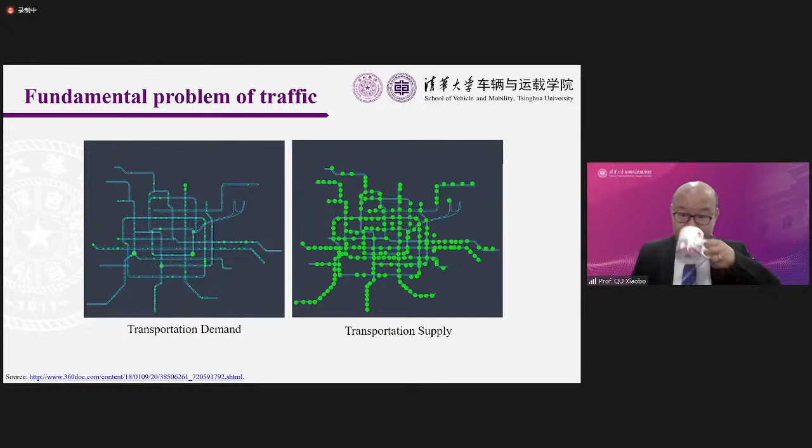And even worse, rapid urbanization amplifies the most fundamental problem of transport, which is the asymmetry between transportation demand and transportation supply.

I will use these two diagrams, two videos, to explain. The left-hand side is transportation demand, the right-hand side is transportation supply for the Beijing subway system. On the left, for transportation demand, we always have very heavy traffic during the morning peak hours.

From 7 o'clock to 9:30, it's very crowded with heavy traffic, while the volume at night is very low. The demand is changing dynamically from time to time. On the morning peak, it's very crowded; during the night low-demand period, only a few users are using our transport infrastructure.

In contrast, the supply on the right is relatively stable. Why? Because supply is determined by infrastructure. If you have transportation infrastructure, you have its capacity, and that capacity is a fixed value. It is not wise for designers to use the highest demand, the morning peak, to design infrastructure, as that would be a huge waste.

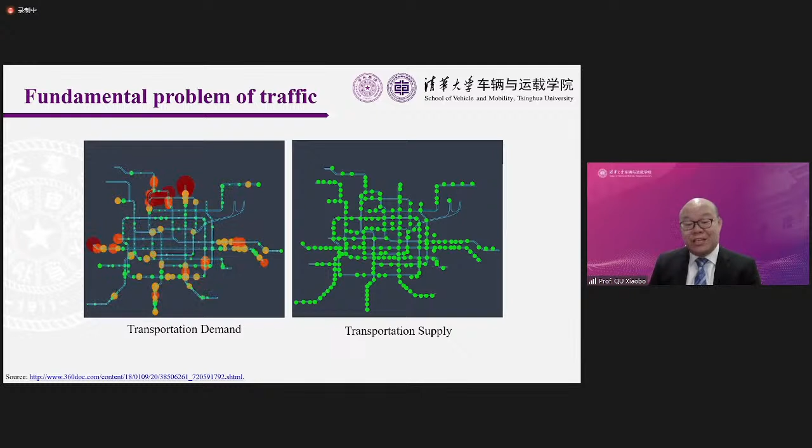We usually use the 75th percentile, meaning that under 25% of the time we are congested, and 75% of the time there's no problem. However, with rapid urbanization, we experience congestion on many more occasions. For example, in Beijing, where we live, the congestion period is certainly not limited to 25% of the time.

And in the past several years in Beijing, during peak hour at some famous train stations, it's not just the train that's full of people - the whole train station is occupied by users, by residents and commuters.

After explaining this background, in the following slides I will introduce a few case studies to demonstrate what will happen in the future. These case studies were done by my group over the past several years, and I want to share with you the latest progress in the area of transportation and vehicles.

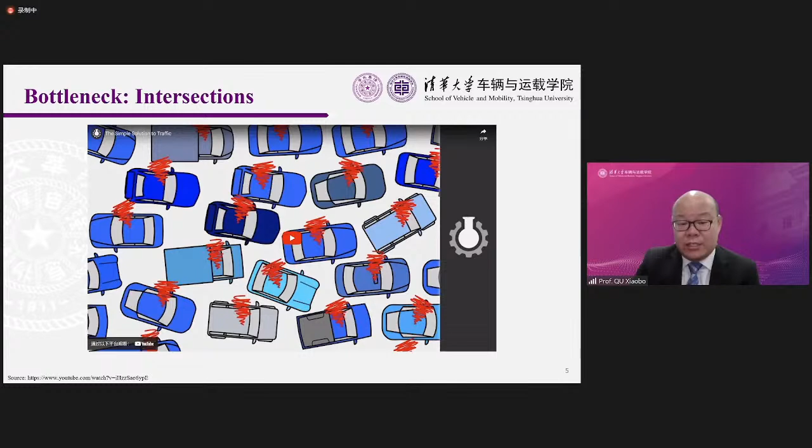So take a look at this video. I will introduce what we can do to solve the problems with connected automated vehicles in our first case study. I will introduce 3 large case studies in today's lecture.

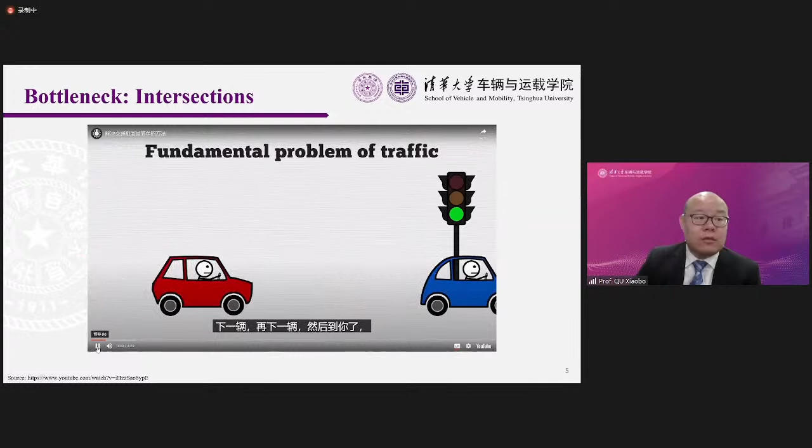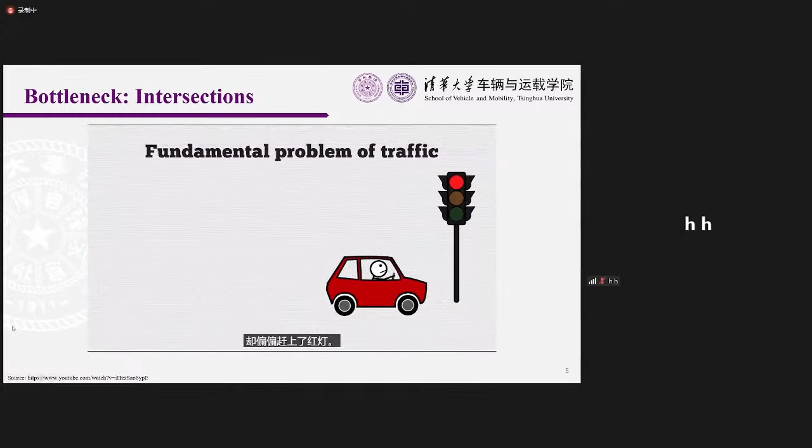Fundamental problem of traffic. On green, the first car accelerates, and then the next, and then the next, and then you, only to catch the red. Had the cars accelerated simultaneously, you would have made it through. Coordination, not cars, is the problem, because we are monkey drivers with slow reaction times and short attention spans. Even if we tried, getting everyone to press the pedal on 3, 2, 1 now would be challenging. This discoordination limits how many cars can get through an intersection, and when one backs up to the next, that's when city-sized gridlock cascades happen, taking forever to clear. In general, more intersections equals more discoordination, which equals more traffic.

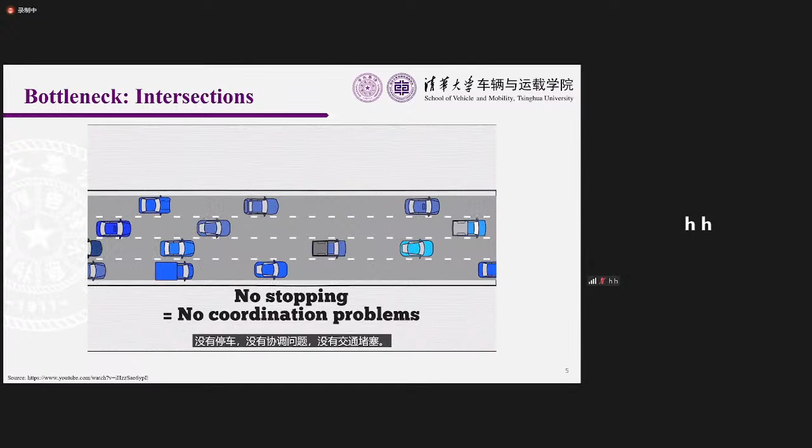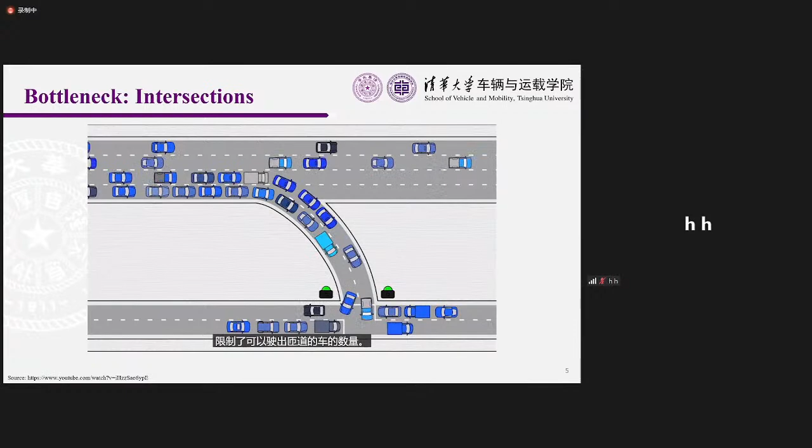This is the motive behind big highways. No intersections. Splits and merges, yes. Intersections, no. No stopping, no coordination problems, no traffic. Well, that's the theory anyway. Intersections outside of a highway will back up onto it, again, because human reaction times limit how many cars can escape the off-ramp when the light changes.

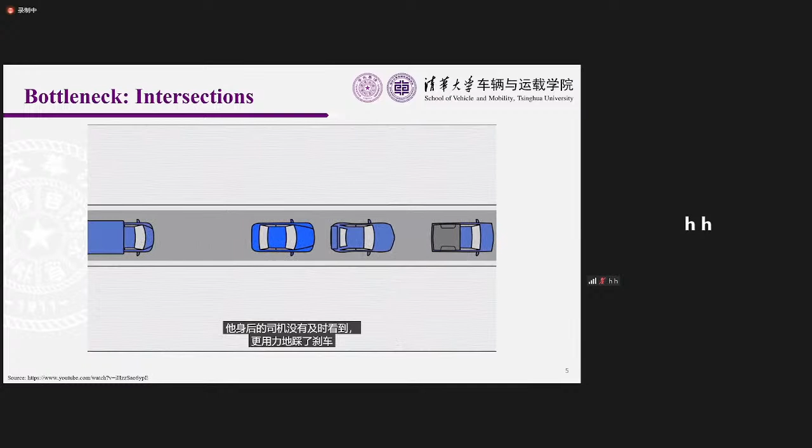But even without intersections, there would still be traffic on the highway. Traffic can just appear. Take a one-lane highway with happy cars flowing until a chicken crosses the road. The driver who sees it brakes a little, the driver behind him doesn't notice immediately and brakes a little harder than necessary. The driver behind him does the same until someone comes to a complete stop. And oh look, cars approaching at highway speeds must now stop as well. Though the chicken is long gone, it left a phantom intersection on the highway. This is what's happened when you're stuck in traffic for hours thinking there must be a deadly pile up ahead, and then suddenly the traffic's over with no wreckage in sight.

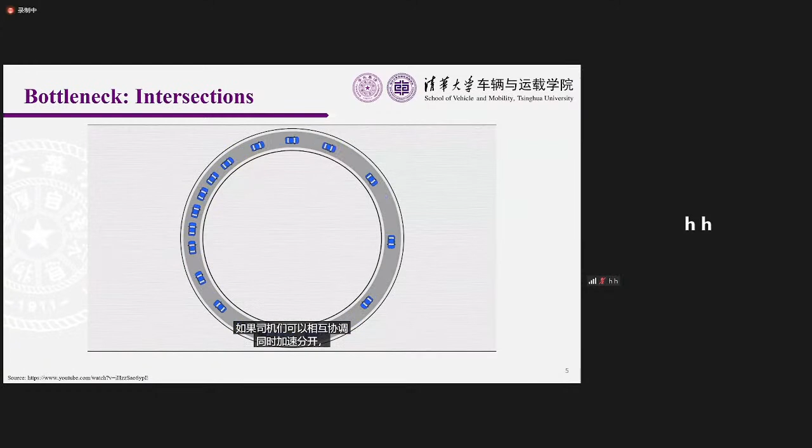To your relief if you're a good person and mild annoyance if you aren't, you just passed through a phantom intersection, the cause of which is long gone. And this phantom intersection moves. It's really a traffic snake slithering down the road, eating oncoming cars at one end and pooping them out the other. On a ring road, a single car slowing down will start an ouroboros of traffic that will last forever, even though there's no problem with the road. If the drivers could coordinate to accelerate and separate simultaneously, easy driving would return. But they can't, so traffic eternal. On highways, traffic snakes grow if cars are eaten faster than excreted, and they shrink if excreted faster than eaten, dying when the last car accelerates away before the next car must stop.

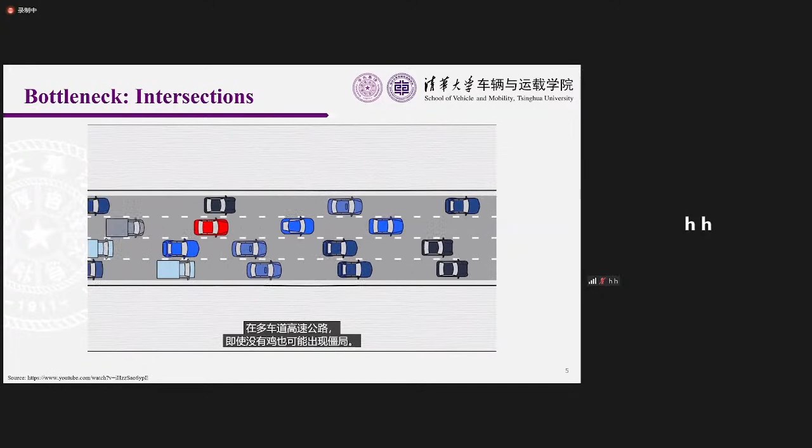Now, in multi-lane highways, there needs be no chicken to start gridlock. A driver crossing lanes quickly with cars too close behind is enough to birth a traffic snake that lives for hours and leagues. It's this quick crossing that causes drivers behind to overbrake and begin a chain reaction. But we can make traffic snakes less likely by changing the way we drive. Your goal as a driver is to stay the same distance from the car ahead as from the car behind at all times. Tailgating is trouble, not just because it makes accidents more likely, but because you as the tailgater can start a traffic snake if the driver ahead brakes.

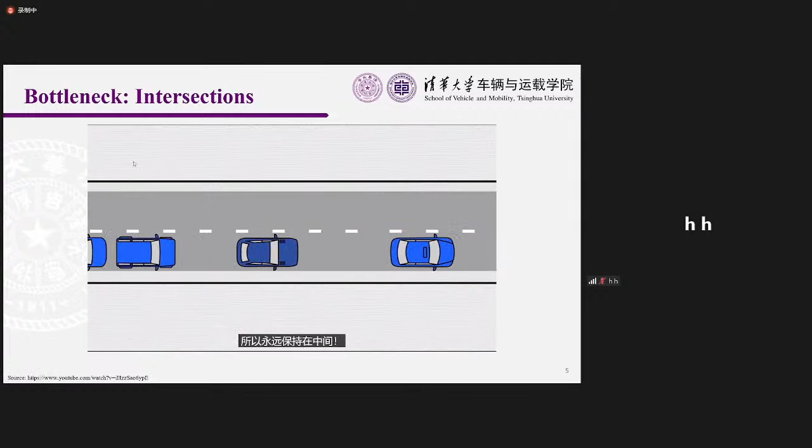Always in the middle. This gives you the most time to prevent overbraking, but also gives the driver behind you the most time as well. And when stuck in traffic, this rule would get all cars to pull apart the snake faster. That's the simple solution to traffic, getting humans to change their behavior, perhaps by sharing this video to show how and why traffic happens, why tailgaters are trouble, and how we can work together to make the roads better for all. The end. Except, yeah, wishing upon a star that people are better than they are is a terrible solution every time. Instead, what works...

Okay. In the following, I will introduce what we can do to resolve the problem with self-driving vehicles. Okay?

So for human drivers, as mentioned just now, we have limitations. We have slow reaction time, we are not cooperating with each other, we make mistakes. It seems not impossible, but not very likely, to solve this problem if we are the driver. At the very origin of the problem is our own limitation. It's very unlikely that people's reaction time can be shortened, and unlikely that our perception range can be enlarged.

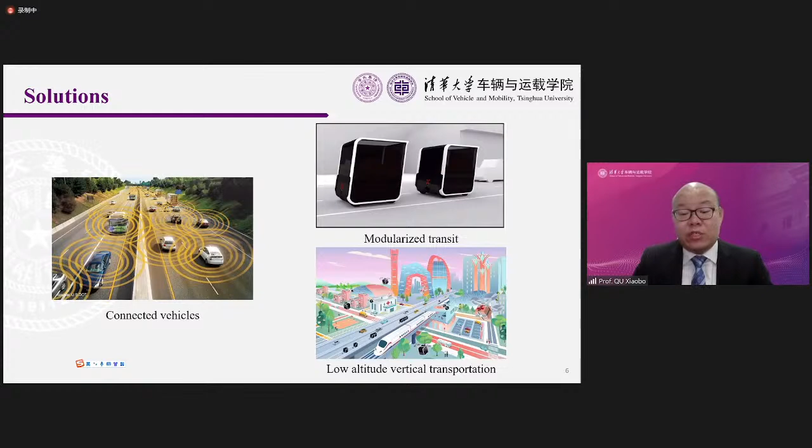However, with the emerging information and computing technology (ICT) and vehicle technology, we are in the process of fundamentally resolving this problem through connected automated vehicles, which will be our first case study. We propose modularized transit, our second case study, and low altitude vertical transportation, our third case study.

The first case study is to use connected automated vehicles, or connected self-driving vehicles, to dampen the oscillations, to solve the snake problem mentioned in that video, and get rid of stop-and-go activities, or academically, oscillations. As mentioned earlier, with human drivers we have our own limits. We have reaction time, and the drivers are different from one another - your reaction time is different from your neighbor's. We are unwilling to cooperate, or even if willing, we don't know exactly how to cooperate to maximize throughput. These are the reasons for the above mentioned problems.

In order to resolve the problem, we as vehicle engineers developed connected vehicles and automated vehicles, mainly attributed to the recent development of information and computing technology, vehicle technology, and very recently AI technologies. Connected automated vehicles don't have reaction time - they are robots, and they have much larger perception range than human drivers, who can only rely on our own eyes. However, for a single connected automated vehicle, the improvement in efficiency is rather limited. What if we have many more vehicles which are connected, automated, and cooperative? What will happen?

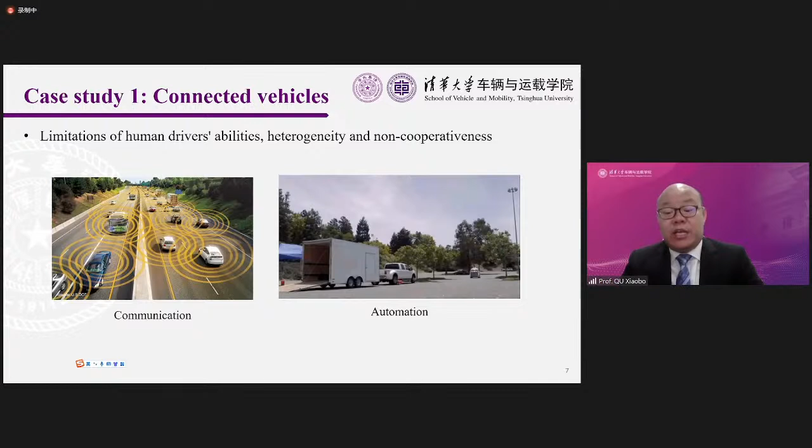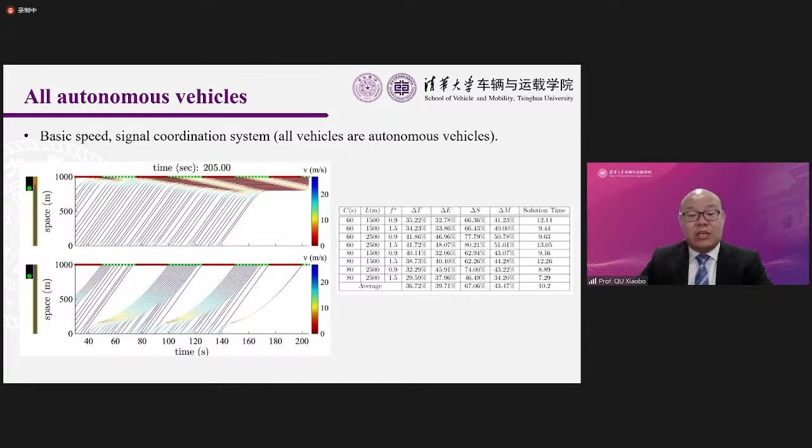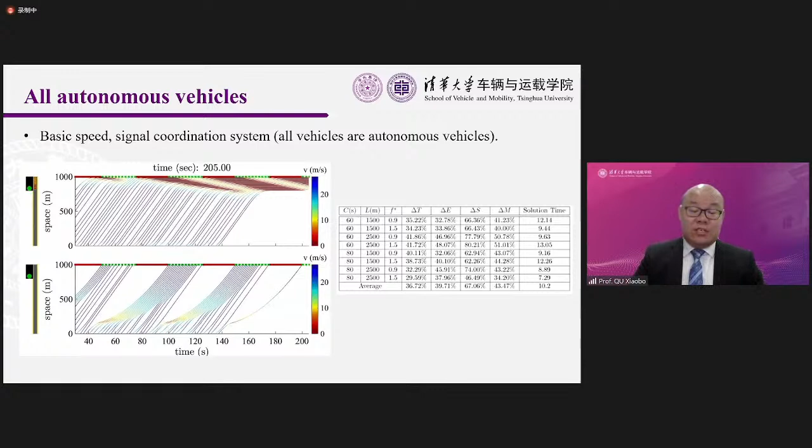In terms of safety, it's much better as well, because with stop and go activities you might have mistakes, and if you have a mistake, you have a collision. But here you don't have stop and go activities. It's easier for drivers to follow each other through the intersection than to have stop and go activities. So you have travel time benefit, energy consumption benefit, and safety benefit, for this kind of scenario if all vehicles are connected automated vehicles.

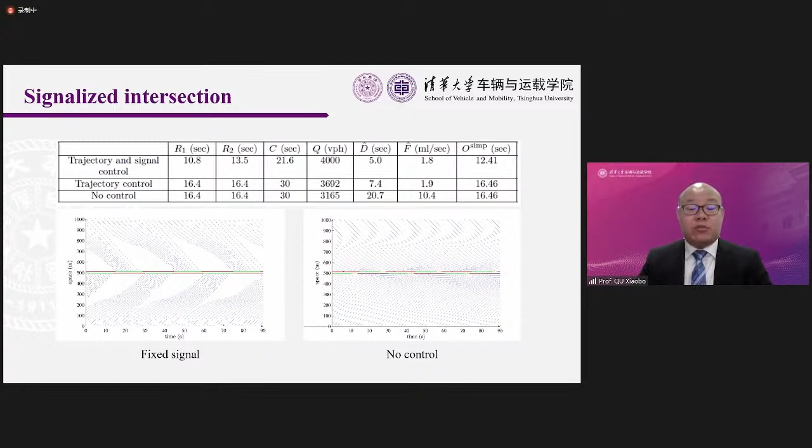Under this case, we will not be able to control each and every vehicle, but we can still regulate these 3 vehicles. We can regulate the trajectories of these 3 connected automated vehicles and influence other vehicles to have a collective benefit.

This example shows a platoon of 30 vehicles, meaning the vehicles are successively arriving one by one with a very similar time difference from one vehicle to another. In other words, the arrival pattern is uniform.

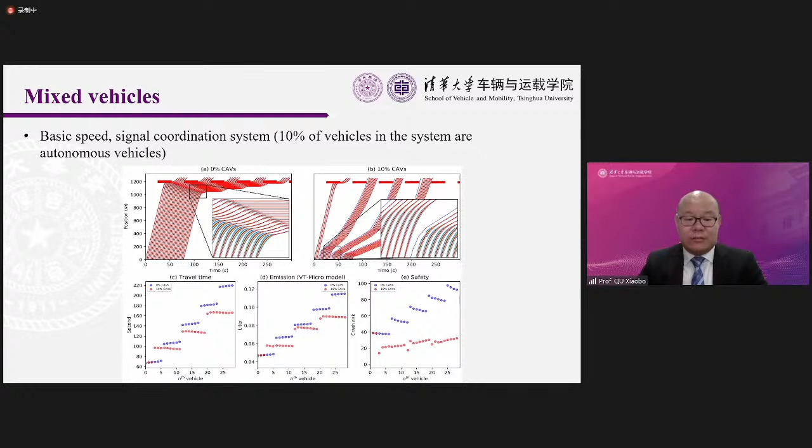When it comes to the multi-lane, multi-flow system, you have left-hand vehicles, through vehicles, and right-hand vehicles. The bottleneck is always the left-handing problem. In a right-driving system such as China, or a left-driving system like Australia, UK, Singapore, the problem is the right-hand problem - it's the big problem.

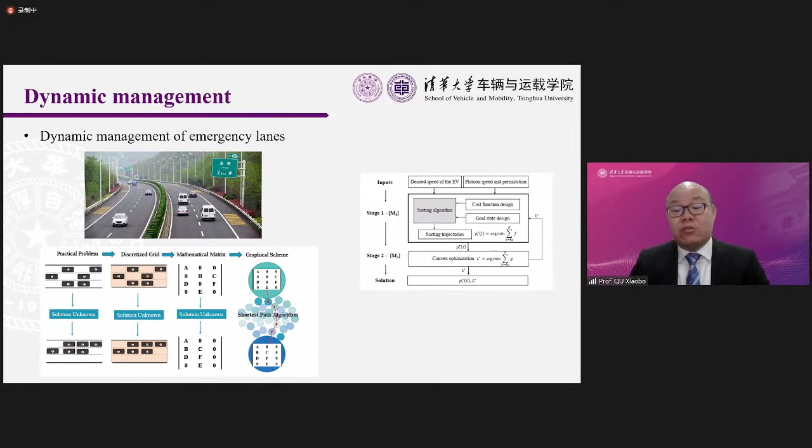These are some simulation results done by my group. If any fire engine, ambulance, or police car is coming over, they will be given priority to make sure the speed is not affected, so they arrive at the incident site as soon as possible.

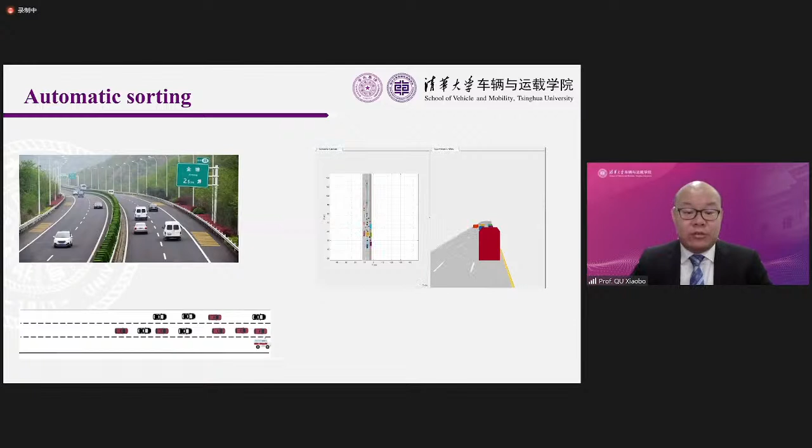Okay, that's the end of the first case study, the case study for connected automated vehicles. Now let's shift our topic to the second case study: a new transportation mode, a new public transport mode - modularized transit.

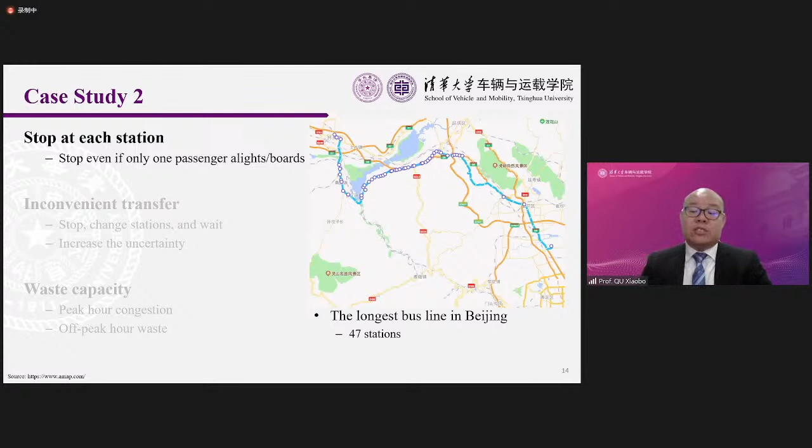For most commuters in a large city, public transport is always the first option. It is cheap, it is green, it is sustainable, right? However, we have a lot of complaints. We are not happy with public transport.

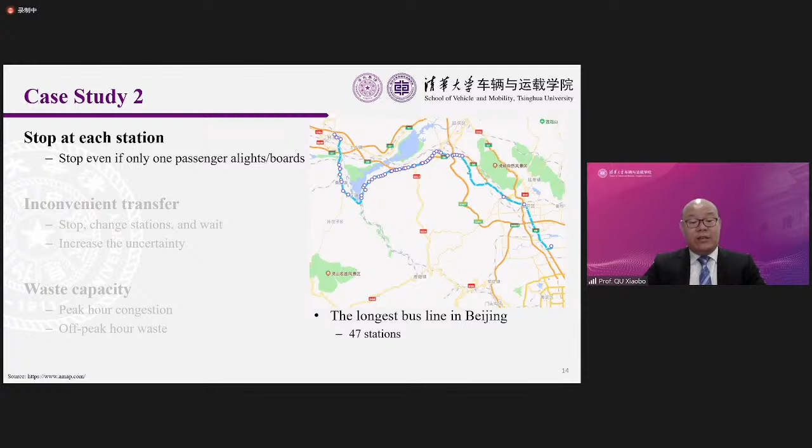First, complaint number 1: it stops at each and every station. Even if only one passenger alights or boards, the whole bus has to stop, and the rest of the users waste their travel time. For a normal bus with 50 people, if only one passenger wishes to get off, the travel time of the rest 49 passengers increases because of the stopping and accelerating. This activity is no good. So the first problem is we don't want the bus to stop at each and every station.

The second problem is inconvenient transfer.

In Beijing, over 35% of trips need a transfer to complete the journey from origin to destination. For each transfer, you have to stop, and you might need to change platform. Some stations have numerous platforms, and you need to wait for the connecting bus.

On one hand, others waste their travel time. On the other hand, your own travel time uncertainty increases significantly. You also risk missing your connecting bus, since you don't know the route from one platform to another. You might take longer than necessary and miss your connecting bus. It's very likely.

So this is the second problem: inconvenient transfer. The third problem is wasted capacity. Buses are always crowded during peak hour, but during the night, even if only one passenger is on the whole route, the whole huge bus still has to operate. It's very wasteful in terms of energy consumption and operating cost, since for the whole trip you only have one passenger but still need the big bus to operate. So that is very wasteful.

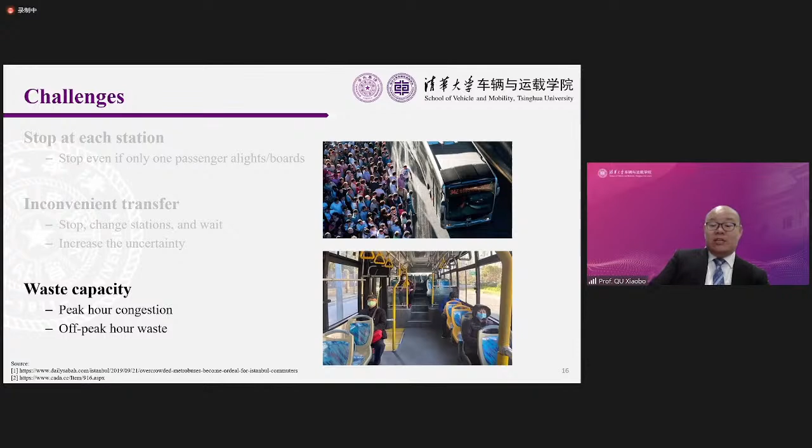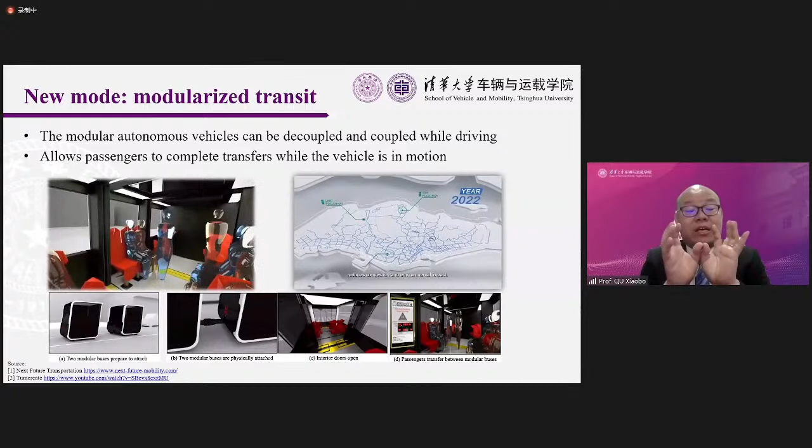So how to deal with this problem? Using traditional buses, it's unlikely to resolve the problem. But with connected automated vehicle technology, it's likely that two cabins can be connected, coupling or decoupling while in motion. One of our collaborating partners designs a modular bus, taking advantage of recent progress in information, computing, control, and connected automated vehicle technology.

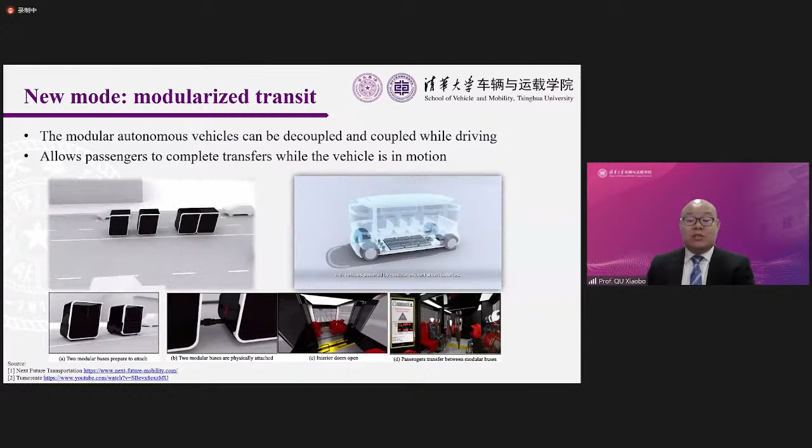The vehicle, they call it a pod or cabin. The cabin can couple or decouple while in motion, while all those cabins are moving. So passengers can move from one cabin or pod to another cabin while in motion. This system can resolve the three problems I mentioned.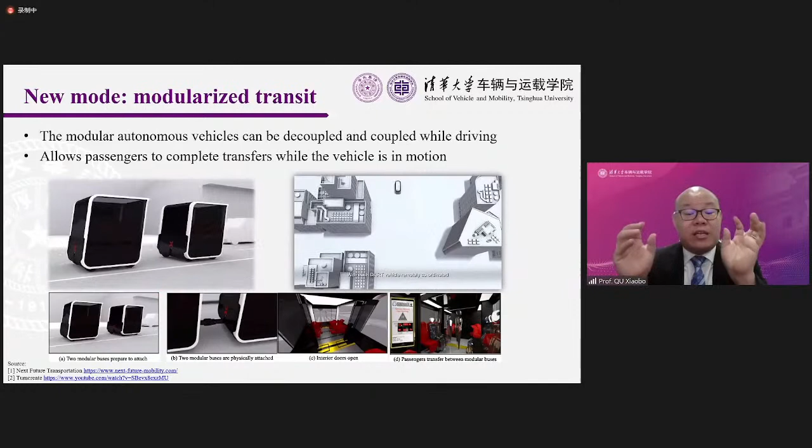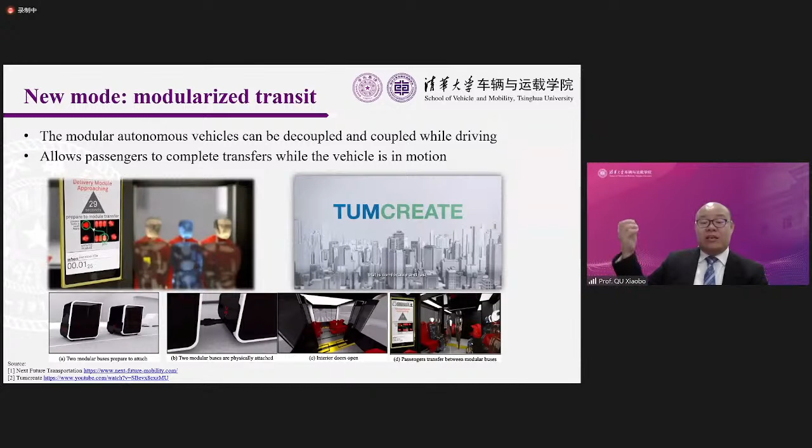During the morning peak hour, we can have multiple cabins linking together, maximizing the utilization of transportation infrastructure and efficiency. Recall the first problem: stopping at each and every station. If you have 6 cabins linking together during the morning peak, and one passenger wants to alight, all alighting passengers can transfer to the last cabin, and then we detach the last cabin for alighting and boarding purposes. All the other passengers don't need to stop, so we don't waste travel time. That solves problem 1.

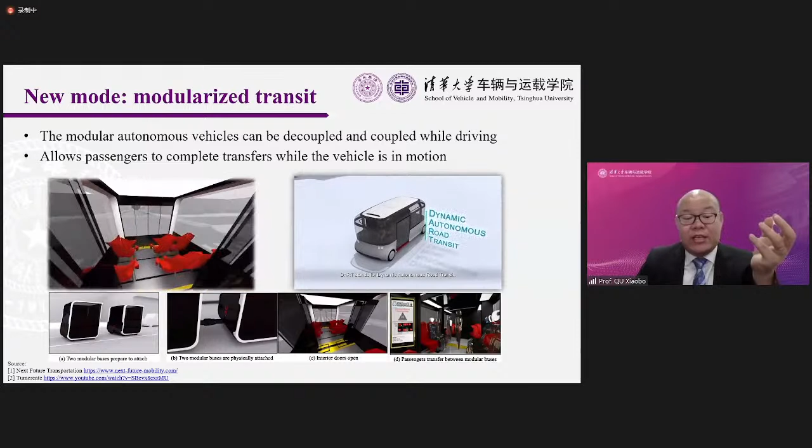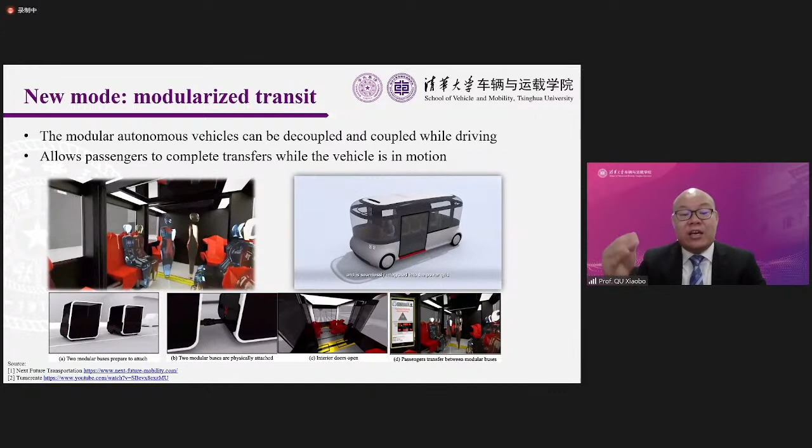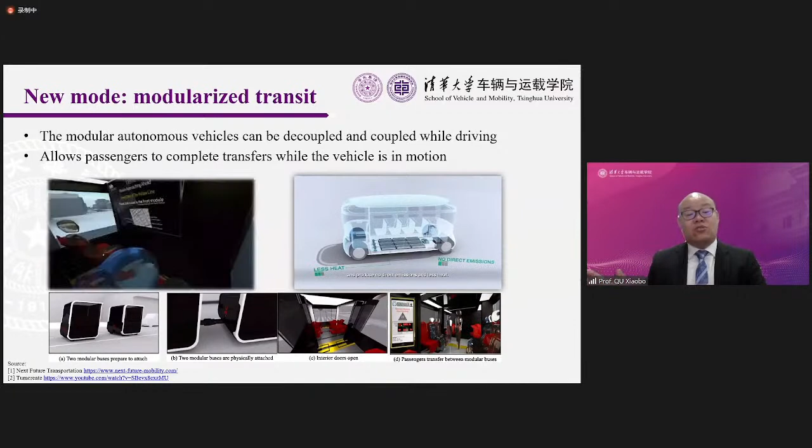Problem 2 is inconvenient transfer. As can be seen in the video, passengers can transfer from one cabin to another while in motion. The transferring cabin can then detach and link together with vehicles going in another direction, just like this vehicle. They can go to another route, linking together with other vehicles, solving the second problem of inconvenient transfer.

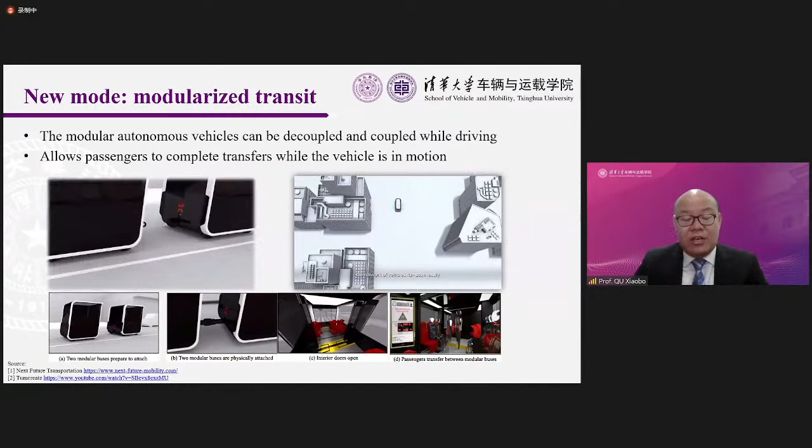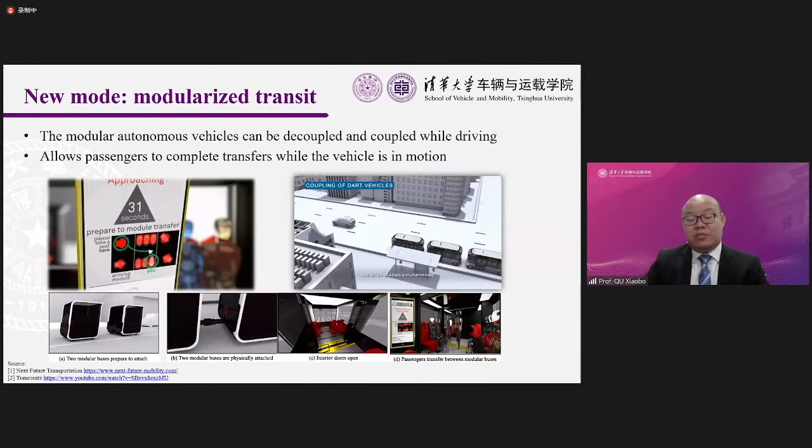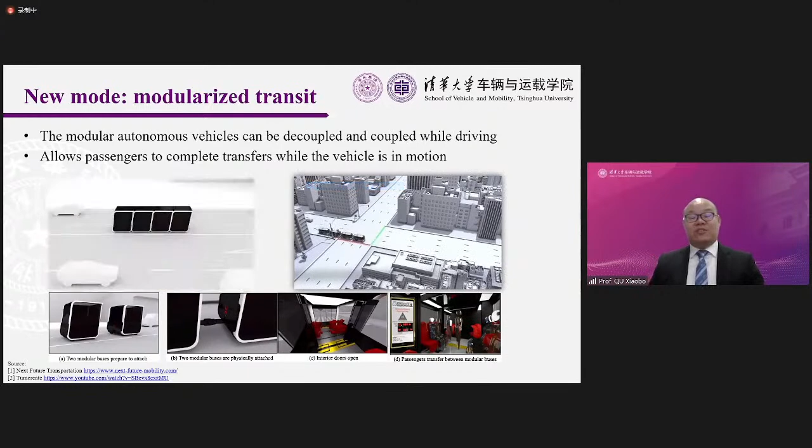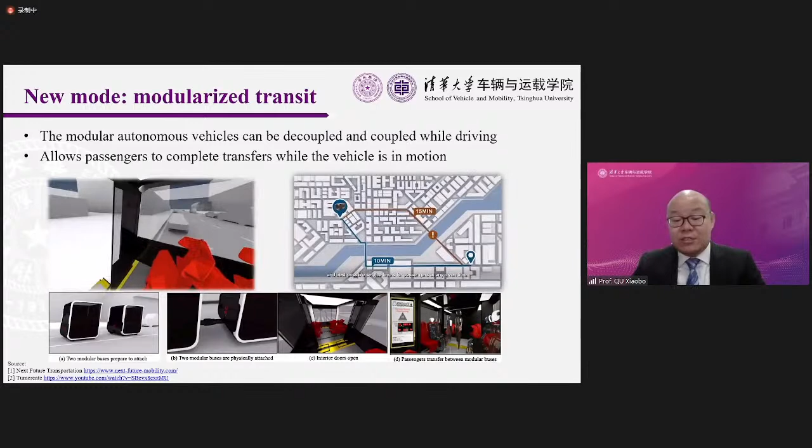The third problem is that during off-peak hours and nighttime, it's very wasteful in terms of energy consumption and operating cost. For this problem, if during the morning you have 6 or 7 vehicles linking together, but during the night you only need one vehicle in service, all the other vehicles go back to the depot for charging. So if demand is low, most vehicles can go back to the depot for charging and don't need to operate.

In sum, during peak hour, multiple vehicles can be connected, reducing congestion because road utilization rate is higher. Normally, between one vehicle and the subsequent vehicle there's a 2 second time difference, meaning at a speed of 16 meters per second, the distance between the first vehicle and the subsequent vehicle is 30-plus meters. But with this system, all the vehicles link together, so infrastructure utilization rate and density are much higher.

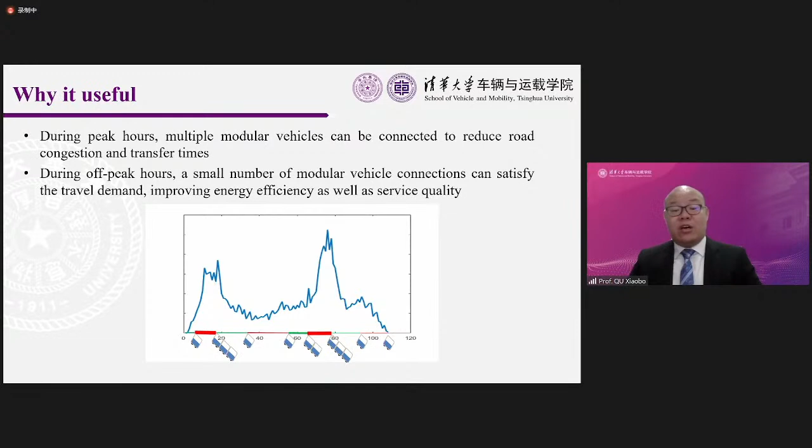During off-peak hours, a small number of vehicles can satisfy the demand, improving energy efficiency as well as service quality, because during off-peak hours it can operate like taxis.

So my group has done a series of products at the vehicle level because we have this next generation of buses and also the connecting parts. We've also done a lot of work at the operational, design, and planning levels. We already have the vehicles and we're now working to improve them. We aim to replace many taxis because for a taxi you only have one driver and one passenger, so the efficiency and car occupancy are not high. We wish to occupy a great portion of the market share.

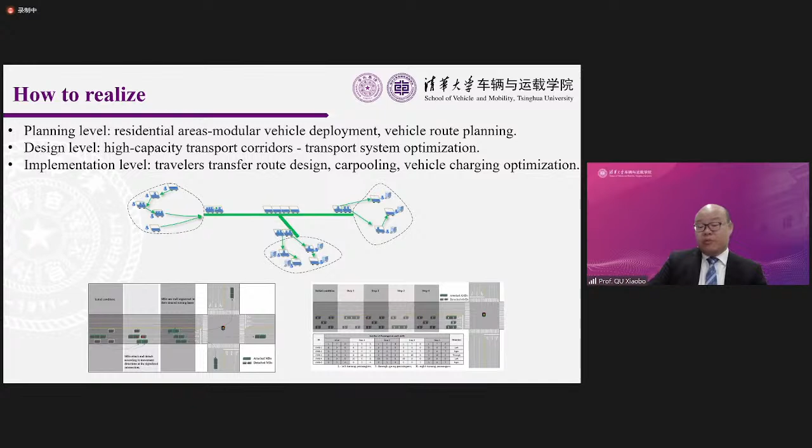So in our team, we are also using the discrete choice model to estimate the market share of this new mode, competing with traditional buses and with taxis. The new market share for buses, for cars, and for this new mode will be different than they are today.

This is a very interesting extension. As all vehicles are connected, physically connected, we can certainly realize intercharging - intercharging from one cabin to another cabin, from one vehicle to another vehicle. In this regard, we can have a small local energy cloud system. Namely, if you are lacking energy, you can buy or borrow some energy from your neighboring vehicles. So you link with your neighboring vehicles, intercharge, and get energy from them.

With this, we will no longer have range anxiety. We also don't need to have a huge battery. Consider your own driving behavior - your remaining battery is almost always greater than the kilometers you want to travel for a given day, or at least there's a very high probability of that. That means you have reserved energy for sale, for lease, to lend to your neighboring vehicles.

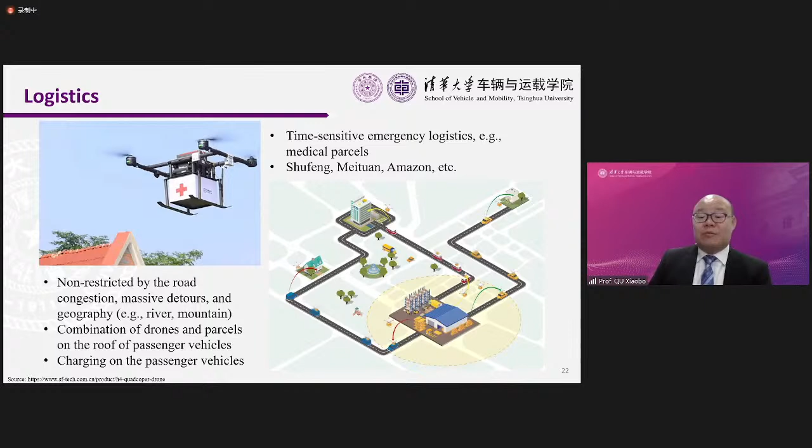Drones, as you can imagine, can be used for logistics purposes—for delivering parcels from one area to another. Certainly we need to examine problems like noise, privacy issues, and regulation issues. But we are certain these issues can be resolved.

Let's consider the current parcel deliveries in your own country. The parcel deliveries are more or less like this kind of system: a truck loads parcels from all the customers at a warehouse or depot, visits a sequence of distribution points, and this is the circle—you visit a number of distribution points or distribution centers, and return to the warehouse.

So this is the truck, and at each distribution point you will have a lot of trailers—usually in Beijing these are tricycles or three-wheeled vehicles that can easily access residential areas. They are responsible for the last segment delivery. Each trailer will travel from the distribution point, deliver the parcels to the end users, and return to the distribution center. This is how most of our current courier services work.

How do we expect them to work? In the United States, they are also examining the possibility of using drones for the last segment. They are also using the truck for the route from the warehouse to the distribution center and back, but their trucks are equipped with drones and charging facilities.

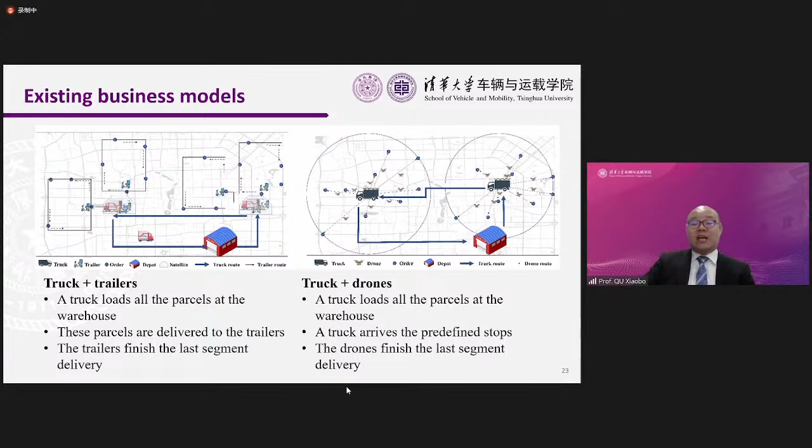As mentioned before, for current logistics we mainly use trucks and tricycles or trailers, and for a very small proportion, they use trucks plus drones.

Take a look at this diagram—this is a case study in Beijing. You have the route from the warehouse to distribution point number 1, number 2—this is the truck route—number 3, number 4, and then back to the warehouse. So this is basically the route of a truck. Then you have the distribution point connecting with the trailers, and the trailers finish the last segment delivery to the end users.

Then you may ask, why can't we use drones to replace the trucks? Because we don't like the trucks—they are very slow, they affect our social vehicles and the traffic flow. The trailers are very irregular vehicles and affect traffic flow substantially. So why not use drones to replace the trucks and trailers?

There are two reasons. Number 1 is regulations, but we can try to convince the authorities. But what are the technical challenges? There are two reasons. First, a drone's driving range is only around 20 kilometers or so, which is inadequate for city-range delivery—the range is limited. Second, the cost per kilometer per kilogram is higher than the truck-trailer combination.

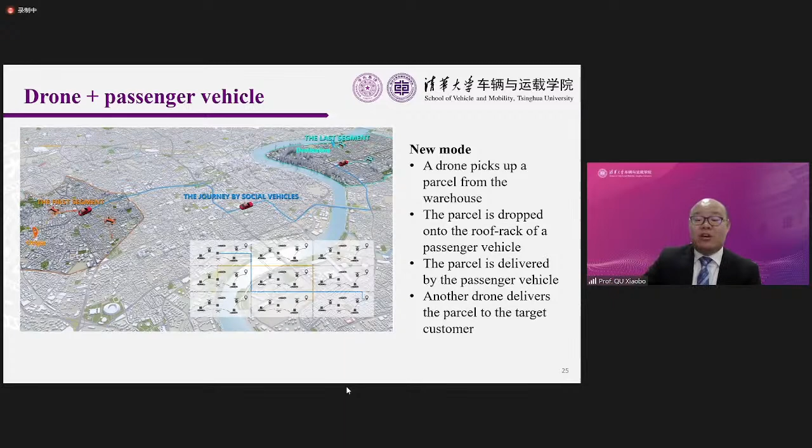For each catchment, because we can separate the city into a number of catchments, for each catchment we can allocate a few drones for the first segment service or for the last segment service. For other catchments it's the same, and the parcel is carried by the vehicle from catchment one to another catchment where the end user is located, and another drone in the end user's catchment flies to the vehicle, picks up the parcel, and delivers it to the end user.

So with this system, if you remember, this is number one, the current system in Beijing. Number two is the system in research papers in the United States. And number three is our system.

You can imagine our system will have the cost benefit because we are using the currently wasted rooftop spaces of social vehicles, so our cost is lower. And we will have the time advantage because you are flying and you solve the last mile, first mile problem. We have a time advantage.

As such, more and more users will use this system instead of the truck-trailer combination. In my group, we also have done work using a discrete choice model to estimate the market share for the current truck trailer combination and our system, and then we can replace a lot of trailers, which will improve the traffic condition, right?

Because we didn't introduce any new vehicles, we replace many trucks. No more trucks, the number of trucks are much smaller than before. The number of trailers are much smaller than before. And we are not introducing new vehicles because we are using the rooftop of the currently wasted social vehicle space.

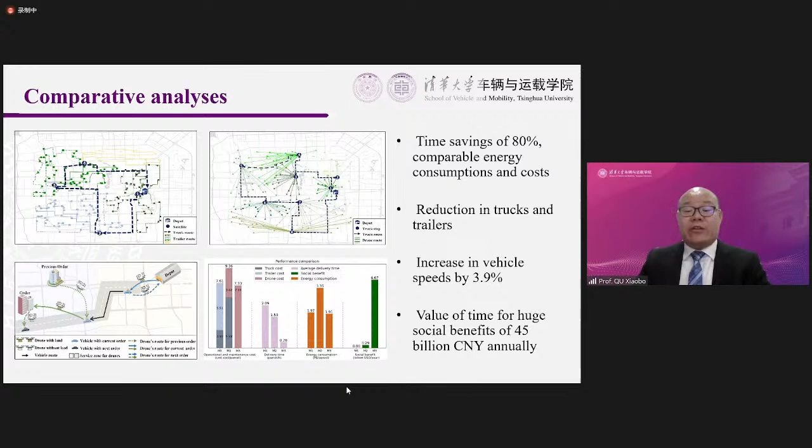We also estimate the social benefit for the city annually. Okay, that's the above example. I will speed up because we may not have enough time for question and answers.

So the above example is for logistics, technologically speaking there is not much challenge. But for passenger transport in the vertical, three-dimensional system, it is still something we are waiting on. We also have done studies for passenger transportation with flying vehicles. Actually, it's not flying vehicles, it's eVTOL, electric vertical take-off and landing devices, because they are not able to drive, they can only fly. They are not land-air amphibious.

Here we only consider eVTOL. They can only fly, they cannot travel on road. We design a land-air cooperation system, similar to the previous example, with the first segment and the last segment using land transportation, while the long distance in between uses the eVTOL, the low altitude air transportation.

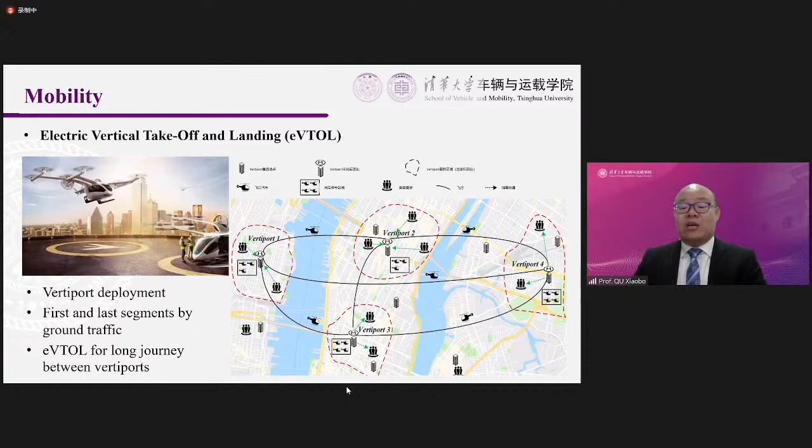This is actually a very huge study that compares 12 largest cities in China and 10 largest metropolitan areas in the United States. We also use high resolution travel time data. I'm not going to introduce the technical details, I'm just introducing a few findings.

Okay, I need to fetch some water. Wait for me 20 seconds. Okay, I'm back.

So first, this is a vertiport diagram. You have quite a few vertiports in different cities, in Chinese cities and in the United States. Chinese cities are more crowded than cities in the United States. We thought at the very beginning this system would work better for Chinese cities.

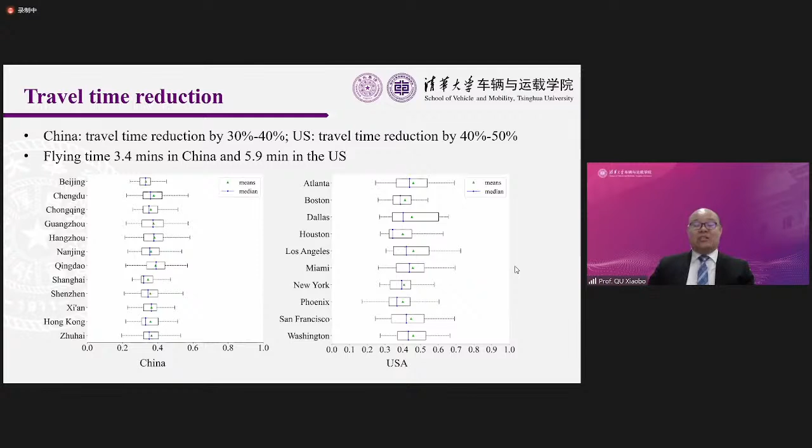If we can develop batteries with 10 minute range, 12 minute range, that will be more than adequate. Even if we have 3 minutes flying time for the urban area, we will use a small battery. We don't need to use a bigger battery, because a bigger battery means heavier, which is no good for the flying vehicles.

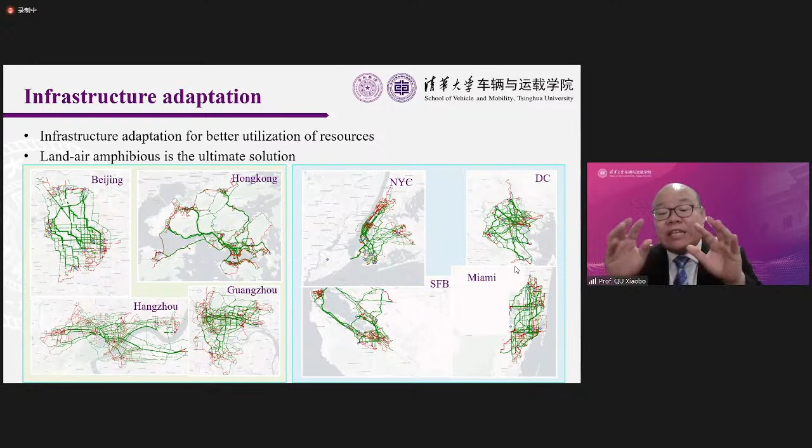This diagram is the problem I mentioned just now. You see the green links, roads - that means the traffic volume will be reduced. The red links mean the traffic volume will be increased. Looking at the demand representation, the long distance travel demand is smaller, you see all the long distance routes are green, it's smaller. But the local traffic, for the local road, the volume has increased. The local road near the vertiport is much busier than before. So we need our road infrastructure adapted to the change before implementing the new system.

Okay, to end today's 3 case studies, it's a very lengthy presentation, so I need more water. I'll share with you a few of my thoughts.

We are in an era of revolution in the transportation area, an era of fast changing, fast developing, and we need more talent working in this area. We have 3 points, and even for general engineering these 3 points are very important. Number one, engineering is increasingly interdisciplinary. We need collaboration between transportation engineering, vehicle engineering, electrical engineering, computer science, social scientists, even lawmakers, because we're talking about the regulations of a low altitude vertical transportation system. So interdisciplinary collaboration is very important.

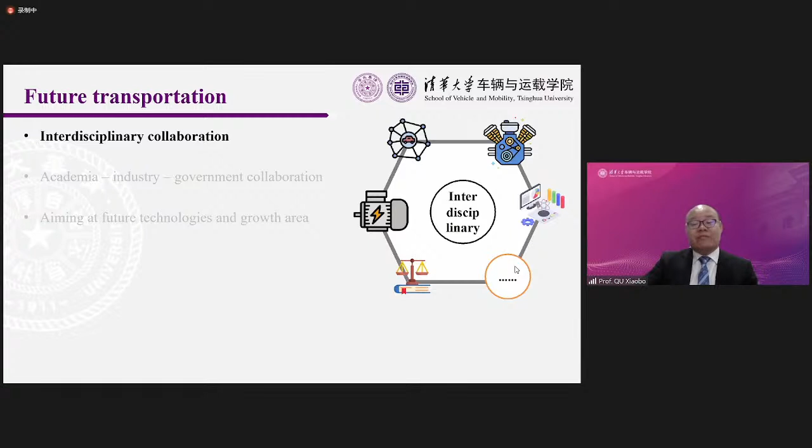Number two, this is a very practical discipline, relying heavily on government investment, and the government gets the total - we have huge social benefit. That means the government gets the biggest benefit. For example, if we use drones to replace trucks and trailers, the biggest beneficiary is not the logistics company, it's the government, because all the citizens and residents will enjoy shorter travel time, shorter commuting time, and that value of time multiplied by their time savings is a huge number of social benefits.

Number three, we need to look at future development needs. We need to focus on the area of high growth. We shouldn't focus on what the operation is now - we should focus on what the future operation will be.

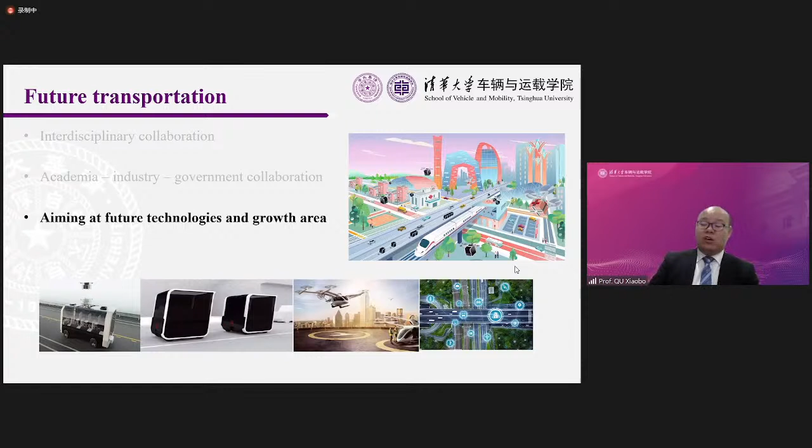As I introduced earlier, I taught in a few very different countries, and as a professor I attended quite a few outreach activities with young students - senior high, junior high, junior bachelor students, undergraduate students. So I found 3 points are very important.

Number one, happiness is actually generated from doing what you love to do, not by the return when you earn a lot of money, right? Genuine happiness comes from doing what you love. We need to find our genuine interest and follow it. And also perfection - in Chinese we call it 止于至善, aiming at absolute perfection. This is another very important deciding factor for your success.

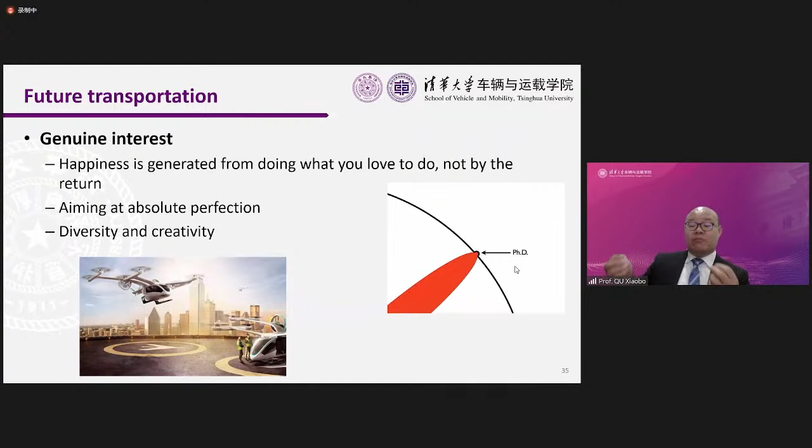Number three is diversity. This is why I love to attend events like this, because we need to meet more people, talk to more people, especially people from different countries, backgrounds, and cultures, because diversity generates creativity. In a homogeneous environment, your mindset is very likely to be confined, fixed, without the ability to think out of the box. Okay, these are the 3 pieces of advice I want to give you.